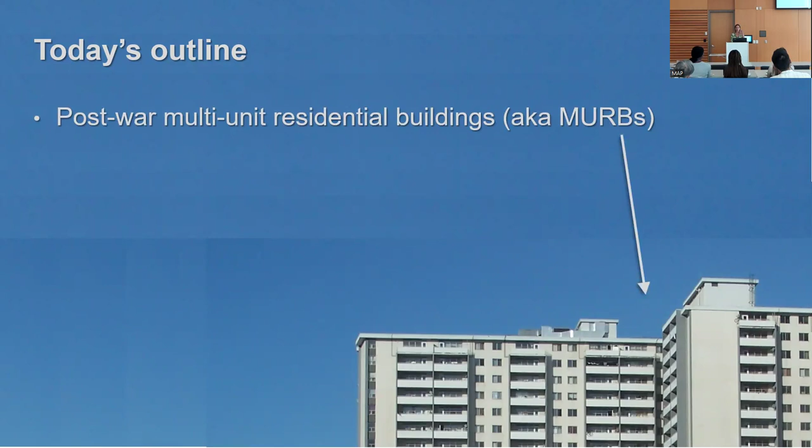I'm going to start off with what MURBs are all about—I'm a little MURB obsessed. We'll talk about some of the performance issues we see now and some of the challenges we're going to see in the future with climate change. Since I don't have much time, I'll flash some technical solutions at you to get things going, which we can explore later in discussion, and build a case for a more holistic consideration.

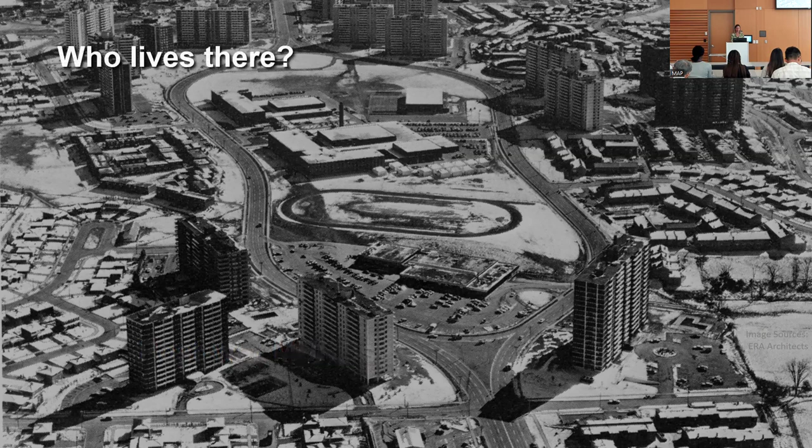So what am I talking about when I talk about post-war MURBs? How many people have seen buildings like this in and around the Toronto area? They are everywhere—we have over 2,000 of them just in the GTA alone. These are a really common building type, and thankfully a lot of them were built and constructed in very similar ways with similar systems, so as we develop solutions for these buildings, they can be broadly deployed across the stock. So who lives there?

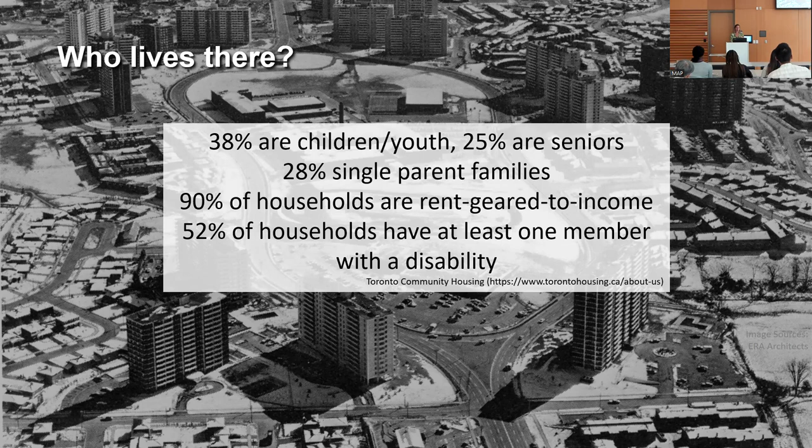I'll preface this: these statistics are actually from Toronto Community Housing, so they don't necessarily represent all post-war buildings. But a lot of these post-war buildings are serving social housing communities, as well as private rental, so we do see a lot of priority communities in these buildings. Many of them are rent-geared-to-income, and many have accessibility challenges. So these are communities we need to be paying attention to.

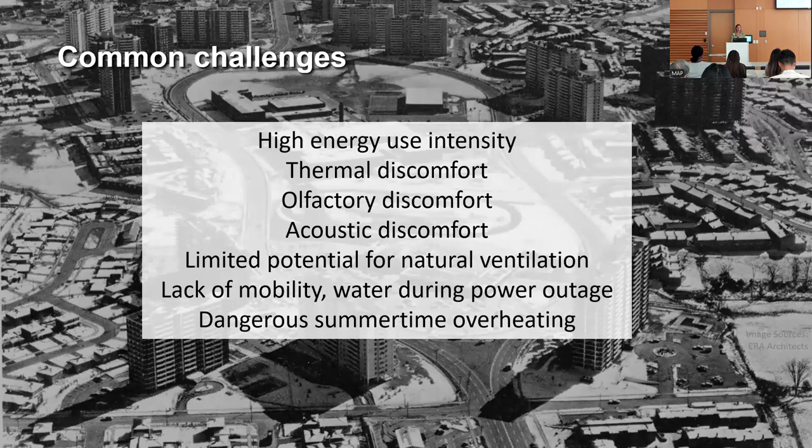As I mentioned, these buildings have a lot of very similar design features, and that leads to a lot of similar performance challenges. I'll step through these in more detail, but they have very high energy intensity. So when we think about retrofit opportunities, these are great buildings to target because there's a lot of opportunity to do better from an environmental performance perspective. While we're in there making changes, we also have to deal with discomfort issues - thermal discomfort, olfactory discomfort, smells, acoustic discomfort, and a number of other issues.

Some of this perspective came from a large study we did. I was working for the Atmospheric Fund at the time, collaborating with my colleagues at the University of Toronto, and then as I joined as a faculty member I came in on the tail end of the study with a different lens. TAF, the Atmospheric Fund, was partially funding some of these retrofits, and we were really interested.

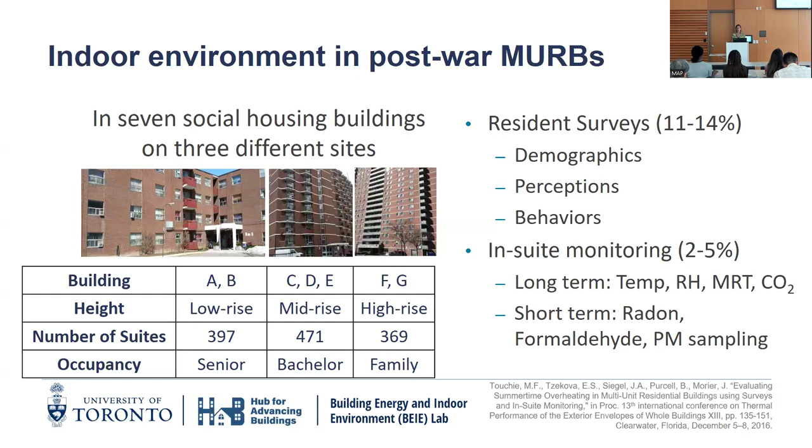These were 7 social housing buildings undergoing deep energy retrofits. They wanted to understand the impact on residents of these changes. So we came in and developed a monitoring program, surveying them periodically to understand what their experience was like. We had low rise, mid rise, and high rise buildings, and these results are all about 10 years old.

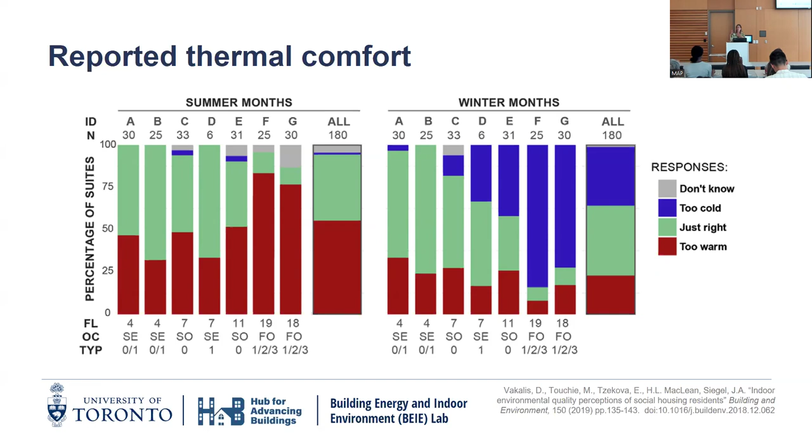Think about these thermal comfort responses, perhaps in the context of what we've been experiencing over the last week. At this time, the majority of residents were experiencing some sort of thermal discomfort. F and G are the high-rise buildings - it's very difficult to control where energy and air go in high-rise buildings, so you tend to see a lot more discomfort issues in these larger, taller buildings. F and G, you can see, 75 to 80% of the time we're uncomfortable in the summer. And in the winter, it's interesting - you've got some parts of the building that are overheating, and some parts that are not.

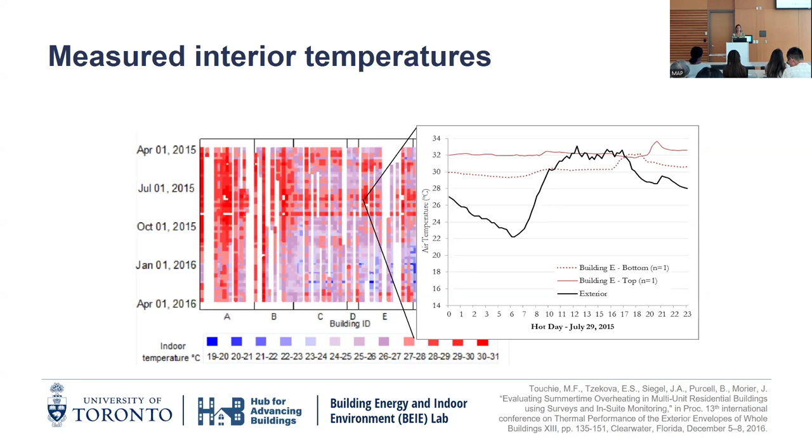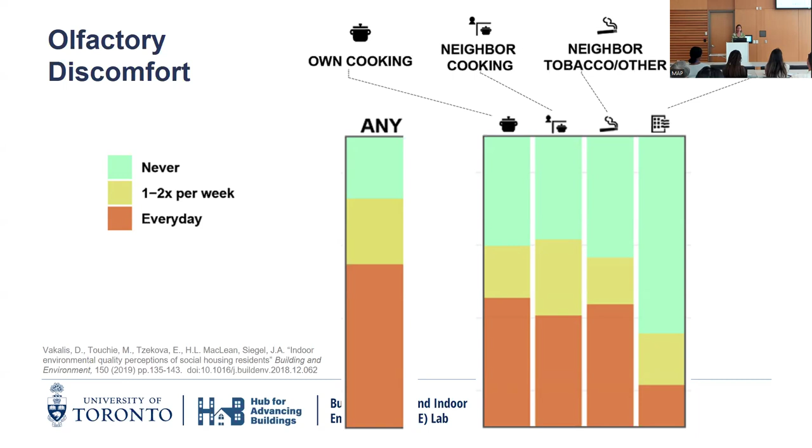From an olfactory discomfort perspective, what this suggests to us is air is not going where it should be. We're not getting enough outdoor air to occupied spaces to dilute contaminants, and we're getting cross-contamination - contaminants moving between suites. So one person smokes, another person smells it. All of these homes are really interconnected, and so there's really widespread olfactory discomfort from various sources.

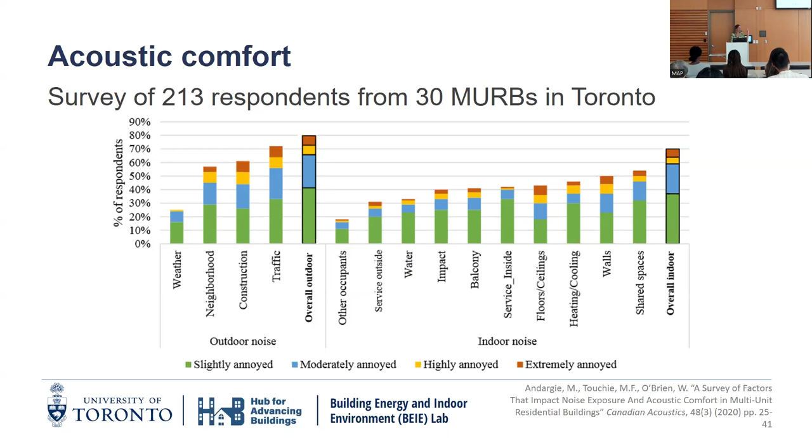This was a separate study, but we were really interested in trying to understand acoustic comfort in these buildings. These are places where your walls are connected to 4 different families - above, below, and side to side - so there's a lot going on in these buildings. I'll note that on this scale, green does not mean good - this is all kinds of annoyance, from slightly annoyed all the way to extremely annoyed. So what you're seeing here is that, again, the vast majority of people are annoyed by both indoor and outdoor sources, and this can actually have a really big impact on people.

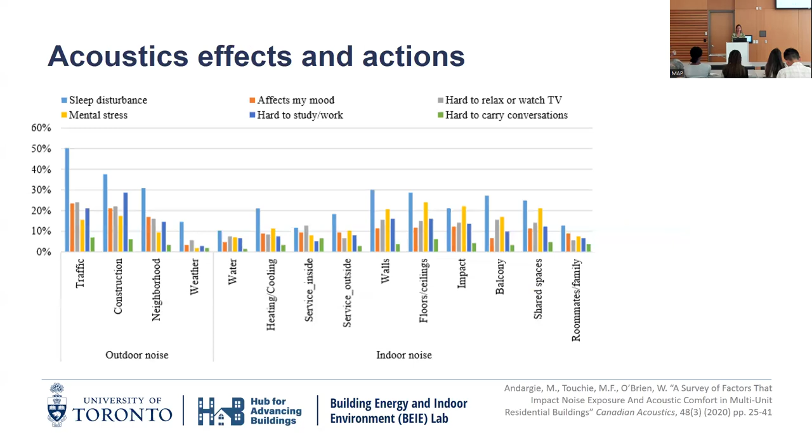It can affect their sleep. It can increase stress. It can prevent them from working or being able to study. So it's not just mild annoyances—it can actually be huge.

We went a little further to figure out how people actually cope with this. What's interesting is a lot of their responses to acoustic comfort can actually make the situation worse—turning up the radio or TV to mask other people's noise, which creates problems for your neighbors. Or it can have a negative impact on building performance, like weather stripping your suite door, which in these buildings is where your outdoor air is supposed to come from.

So you're potentially shutting off your one source of ventilation air to deal with these issues. The other really big thing we've seen in a lot of our post-occupancy evaluations is control. A lot of these larger buildings have central control. In these post-war buildings, how many thermostats do you think? Two—well done. One for the north side and one for the south side, or the east and west side, and that's how the entire building is controlled. So how do residents modulate their temperature? They open and close their window.

You can see there's these connections between comfort and energy, because if you're opening your window to reduce overheating in your suite, you're actually wasting a lot of energy, which then drives higher energy use. So frustrating for residents, but also has a real impact.

These are a number of quotes I just pulled from a post-occupancy evaluation we just finished, in a building in Hamilton. It's kind of disheartening to see. This was a deep retrofit building with new technology, brand new windows, and because there was no consultation with residents to identify some of the challenges with these new technologies, they're having a lot of challenges.

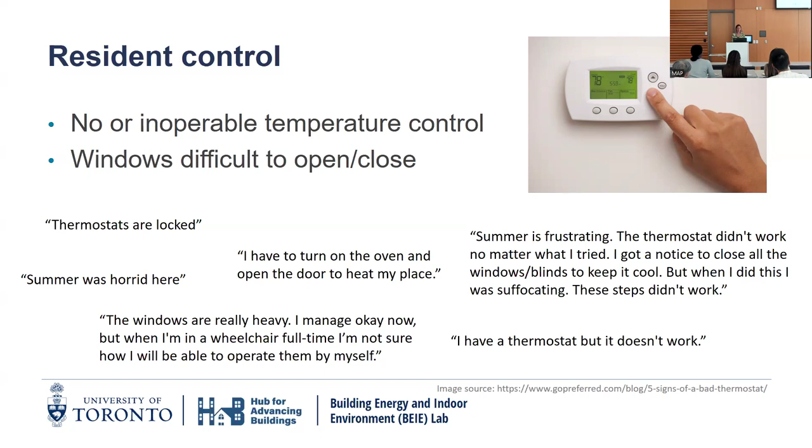In this context, I'm not going to spend a lot of time on this—I think we all know where we're going, we've experienced a lot of everything last week. So we really need to start thinking about: these buildings are not doing great now, so what are we going to do to better prepare these buildings for the future?

What we're going to start to see is increased cooling loads. The context there is, when we think about retrofits, people are often thinking about insulation, making it super airtight, adding triple glazed windows. My question is, do we really know that, or should we really start thinking about overheating?

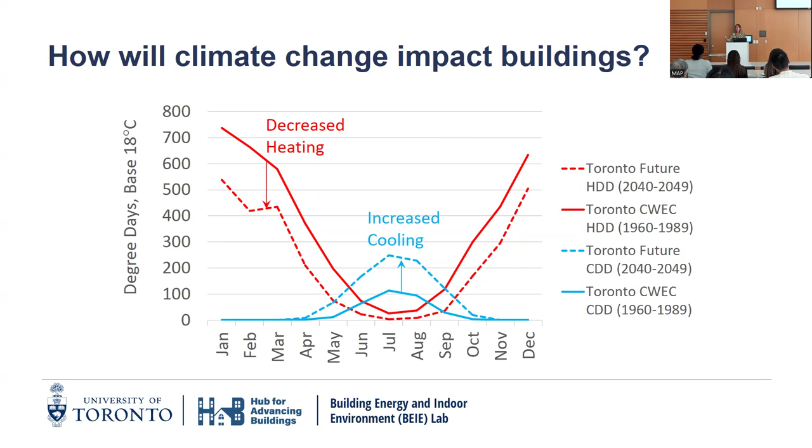What are some of the measures we can do to reduce overheating? Well, of course, reducing heating load—we'll still be a heating dominated climate for a while. But in the time I've been working in this space, we've already warmed two climates. It's happening quickly, and I think we need to pay more attention—not totally forget, but let go of some of our past practices and think about what else we need to do.

So just flashing at you, this is an indication of the CWEC—a standard weather file that we use to model our building. When we're trying to understand the implications of a design change, we create a model of our building, stick a weather file in there, and test run that building. We can see how much energy it's going to use, and what temperatures it's going to be in the space. But we use historical weather data.

So one of the things we need to start doing is integrating future weather. This was just one quick example where we compare the weather data we're using now to what we might be seeing in the 2040s. You can see that our space cooling energy use is going to go way up.

On the right-hand side is what we call unmet cooling hours. We design and size our heating and cooling systems based on what these energy models tell us. So if we are designing a system to meet that little tiny rectangle under CWEC, we are vastly under-designing the system to meet the needs of the 2040s.

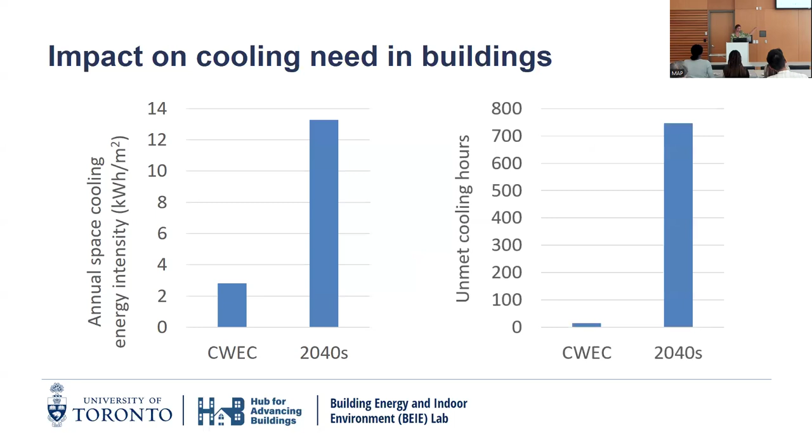So what impact does this have on people? Well, in a lot of parts of our society, people have air conditioning. But when we look at sort of the lower end of the income scale, and when we map that to who's living in these buildings, these tend to be communities with far less access to air conditioning. And this is problematic given some of the features that I just presented in these buildings.

These buildings are different. The windows are restricted to 4-inch openings. They don't have any solar shading. There's a lot of things that are actually making these buildings worse in terms of the environment that they create for residents. Plus, there's no air conditioning.

So I can flash all these numbers at you, but I just wanted to share, if you haven't seen this, CBC did a really nice investigative journalism piece on people's experience in these apartment buildings without air conditioning. And I found it really eye-opening. This is what we've been hearing from a lot of our residents that we work with in studies. But some of the videos were really compelling. So if you haven't seen this before, I encourage you to take a look.

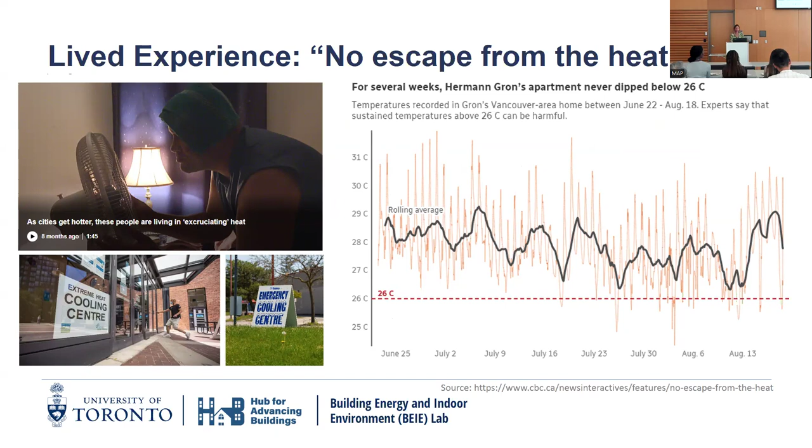But there's other things that we need to consider here. Outdoor air quality is a big one. Less so in Toronto, but we were getting there last summer. I remember smoke for a week or so there. So we need to start thinking about other ways that we can protect. We don't have central filtration, so we need to think about that as well.

And one big one that really worries me is power outages. And we saw that a little bit yesterday. But the backup capacity that a lot of these buildings have is pretty little. Emergency lights, maybe some elevators, maybe some pumps. But if we're going to have a multi-day event, these buildings will be uninhabitable.

So where do people go? What if you have accessibility issues and the elevator goes out? There's no water anywhere. There are a lot of issues here, and I think there's this looming challenge where I don't know where we're going to put hundreds of thousands of people. This talk is all about post-war towers, but the same could be said of all of the glass condos that we have.

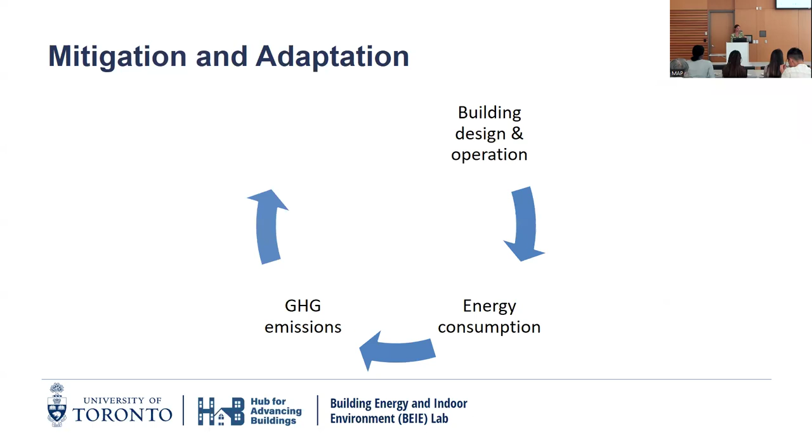So stepping back from this, we often talk about climate mitigation and adaptation as 2 separate pathways. But I think within buildings, and probably in other areas, we really need to think about these issues as being related. Because the way we design and operate buildings has a direct impact on energy consumption, which influences our GHG emissions, which in turn influences climate change. And so by driving one down, we can actually positively impact the other.

So when we're thinking about retrofit strategies, we really need to think about this through 2 lenses. We obviously want to reduce our GHG emissions, so reduce that environmental impact, but we need to start making change. We can't just keep doing it. We have to think about what these buildings are experiencing. Major renovations in these buildings only happen so often. So this is our one shot to get it right. This is going to impact families for generations if we don't.

And so when we talk about mitigation, we're talking about things like reducing energy consumption and electrification. In a lot of these buildings, I'd say 80% of the carbon emissions are because of the natural gas that's used for domestic hot water and for space heating. So getting away from those sources is critical.

On the adaptation piece, we need to increase cooling capacity, even though that has a negative impact on our operational carbon. As I mentioned, I'm really nervous about this backup power piece. We need to be more thoughtful about that, and about developing more robust ventilation strategies. I don't have time to talk about all of our research today, but if folks are interested in that ventilation piece, we're doing a lot of work on that.

But what I'd like to propose is a third lens as well. If we're investing millions and millions of dollars, like a deep energy retrofit in a tower, I've seen costing between $15 and $20 million. This is an enormous investment. If we are investing this much money, we need to also take that opportunity to improve the experience of individuals. This is not all about reducing carbon. Also, let's make these buildings better.

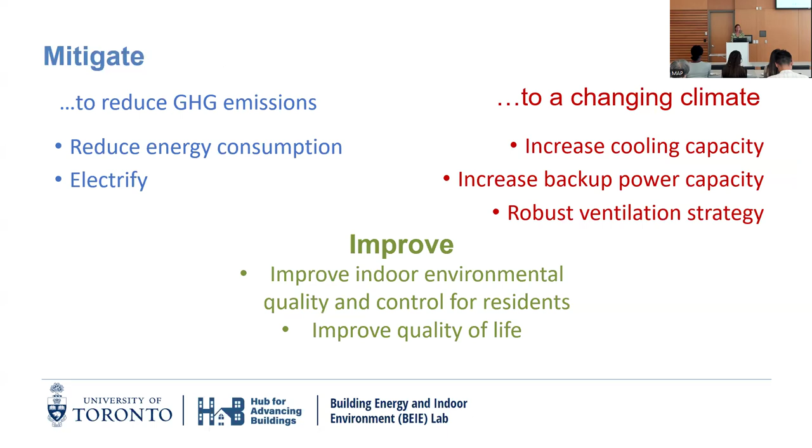And there are a lot of solutions that we can take on. So I'm going to put these roughly into a couple of big bins. So passive measures, what I mean by that is things that don't need energy. These are just changes that we can make to the enclosure that can reduce energy.

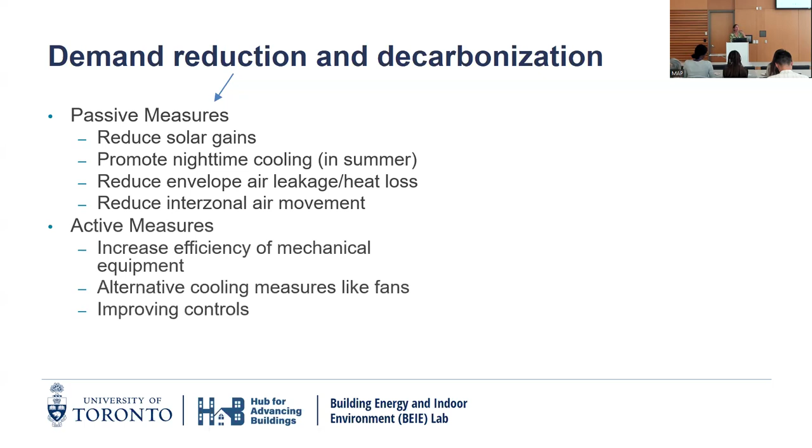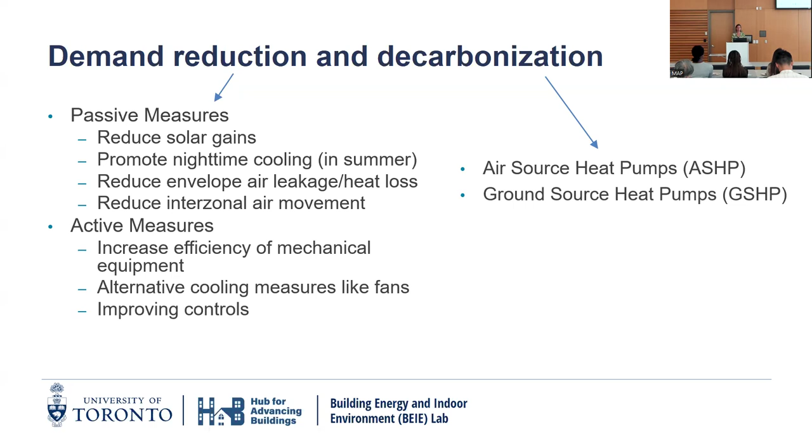Active measures, which are actually active systems, things like space heating and space cooling systems. And then when we think about the decarbonization side, this is really all about fuel switching, so getting away from those natural gas appliances into electric. So this one I'm going to go fairly quickly through. I don't want to overwhelm you with a bunch of different technical solutions, but I just want to show you there are some things that we can do that we're not doing.

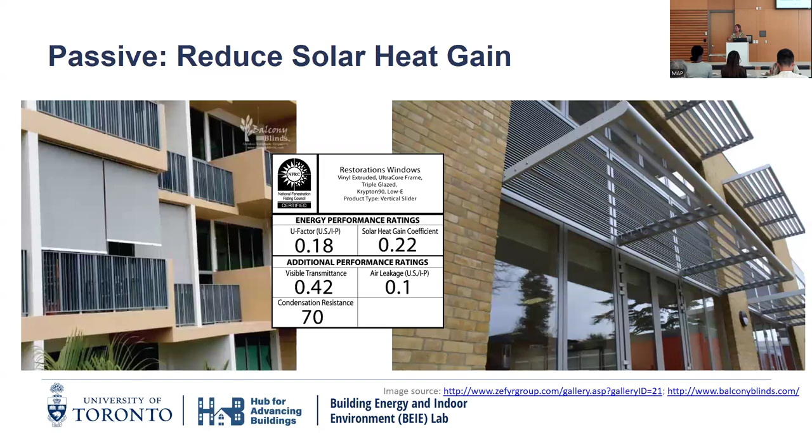Every time I travel, I think my husband gets, you know, I can't stop taking pictures of exterior solar shading. I'm like, you're doing this. They're doing it so well, and it's in cold climates that have snow, that have high winds. Like, this is possible, and I just don't know why we're not doing it here. And it doesn't have to be fixed. They have really great operational options as well, and it's particularly in buildings with balconies. I think that this can actually improve usable space too, because you now have a shaded outdoor space where you could shelter if necessary.

The other one, so I'm not sure if you're aware, but we have window opening restrictions, which are at 4 inches. You can take it off, but you're supposed to take it off for like safety issues. But one really simple thing to do is actually just to move the window opening up above the balustrade. So where you have a balcony, you can do anything there if you wanted to. But you can really open up those windows and design those windows to more fully open if you move the opening level up.

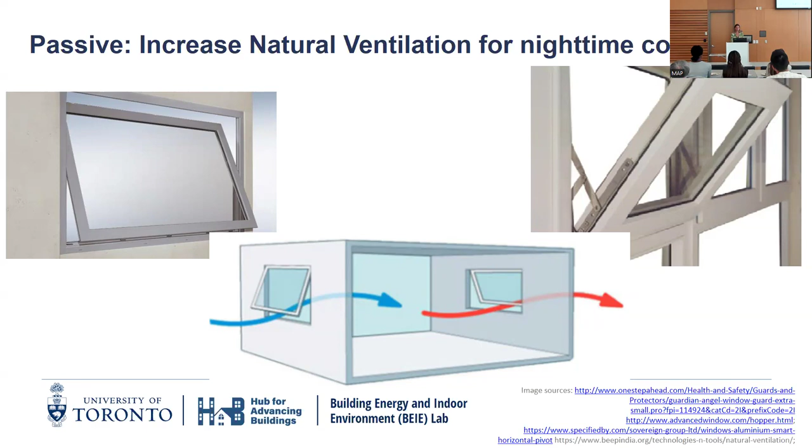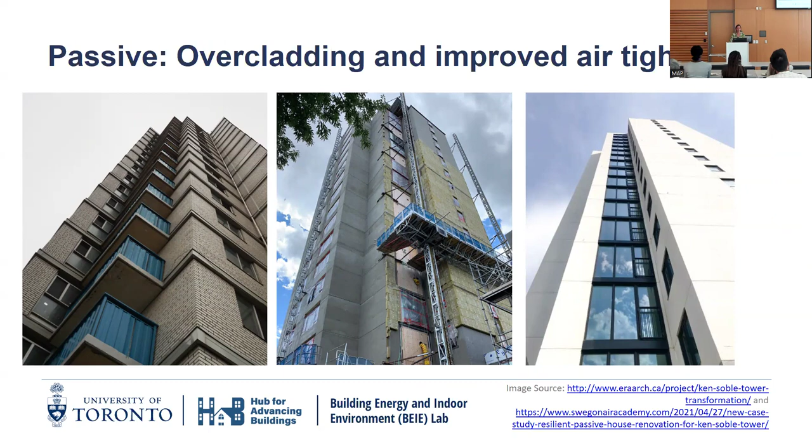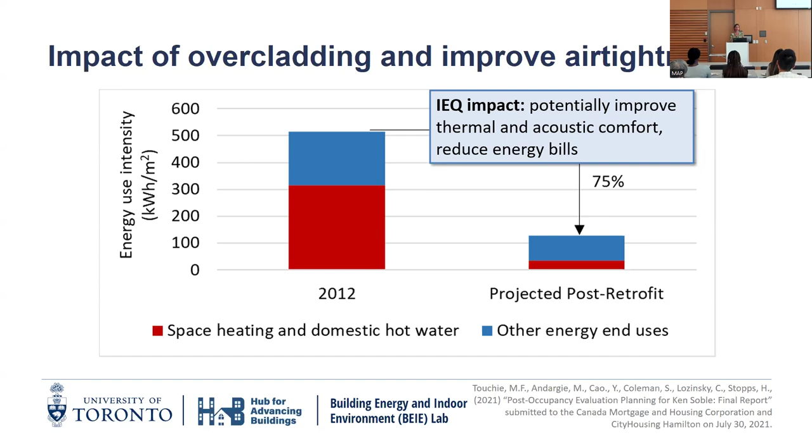Really popular right now is overcladding and improving air tightness in buildings. This is actually the building that we've been working with for the last 2 years in Hamilton. We've been following the residents, and you know, great strategy for reducing your carbon emissions, but can also have, at least in the wintertime, really good impacts for thermal comfort. But I kind of want to flag this. This is not necessarily a pathway that we absolutely should take. People are using this pathway a lot, but this is incredibly material intensive. We're adding a lot of material which has carbon associated with it, and it can potentially lead to overheating issues. Passive House, which is the standard that was regulating this particular retrofit, is great for space heating, really reduces space heating, but doesn't do a great job of contemplating overheating. And so we started to see that in this place.

So one piece that I don't think we're talking enough about, and something that I've spent a lot of time in my group looking at, is what we call interzonal air leakage. I mentioned before that all these households are connected to one another through airflow paths. That has implications for pest transmission, sound transmission, and as we showed through some of the recent studies, energy use. So this is one retrofit, fairly low cost, fairly low energy, and not that disruptive to do, that can actually tick a lot of boxes when it comes to comfort and energy. And little things like adding elevator vestibules. It sounds like a small thing, but elevators connect to these huge vertical shafts that really drive the stack effect. So you're getting a lot of uncontrolled air movement moving through these vertical shafts.

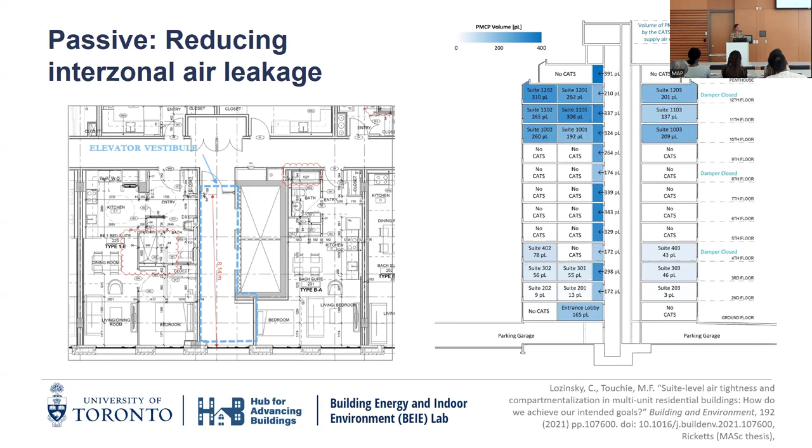And so one really effective way to achieve this with any operating residence is to seal off those vertical shafts so you kind of get each floor operating. I've had conversations with a lot of building owners on this. This is not unachievable. It's just a little more challenging depending on the type of building, but essentially what I'd love to see is each suite actually treated as an entire building.

What I would love to move towards is having in-suite ventilation through the form of a heat or energy recovery ventilator, really air sealing that suite. By tightening up that suite, you're effectively making this like an independent little house in the sky. So that person in that suite can do whatever they want. It's going to have very little impact on others. So that's kind of the direction to go.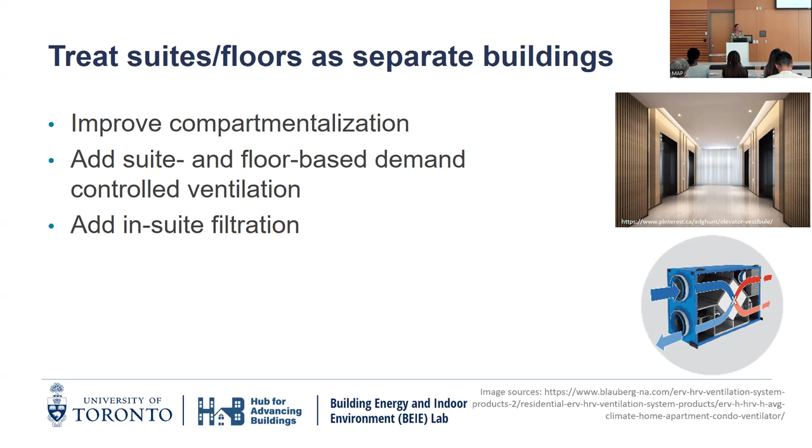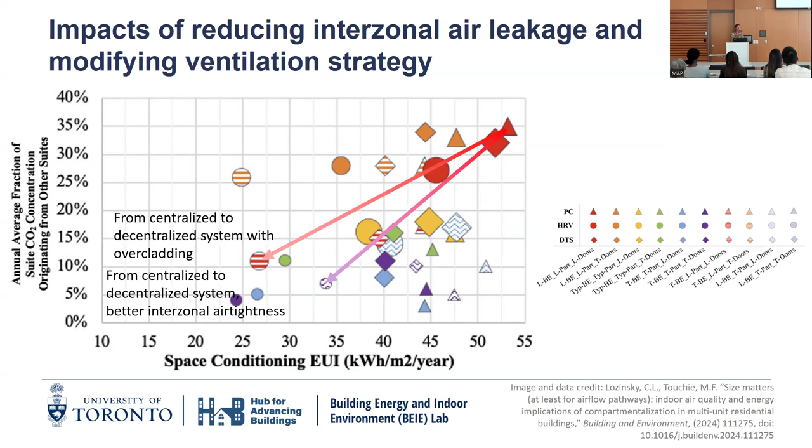So essentially what we want to do is move from the top right to the bottom left. As we make that move, we're reducing energy and reducing that interzonal transfer. And so we can do things like move from a centralized system, which can get us part of the way there. But we can make some really big leaps by just tightening up key parts like the elevator doors and stairwell doors. And then when we put those things together, when we make that centralized to decentralized move and really try to tighten up the suite, we can see improvements in both areas. So again, I think this is a strategy that we need to start paying attention to.

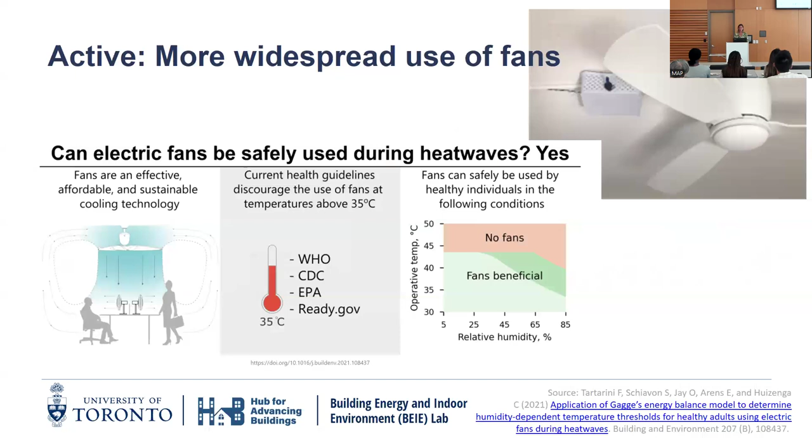The other piece too is where I think we need to start paying more attention to the co-benefits of this. There's a lot of talk about air source heat pumps right now. I mentioned we need to electrify, we need to get off that natural gas. So one of those things we can do is go from natural gas appliances, boilers, and things like that to heat pumps. I think it makes a lot of sense just from a decarbonization perspective, but it also has the added benefit of adding cooling where it wasn't before.

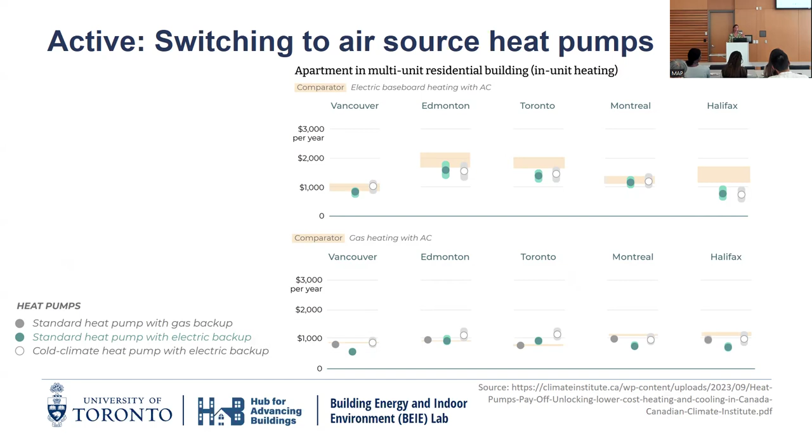Smart thermostats are another area that I think we need to start paying more attention to. They can not only decrease space conditioning loads, but they can help with all sorts of diagnostics on these buildings. One really interesting idea, and I think there's some researchers at the University of Waterloo who are working on this, is we can take advantage of the smart technology to help warn people when their indoor spaces

are no longer safe. I mean, we have smartphones and smartwatches where we could absolutely do the same, but to embed that sensing technology and that ability to warn people, you might want to go to a cooling center, or you might want to consider turning on the AC, or grab that fan. So we can use building control technologies to actually provide real-time feedback to residents to keep them safer.

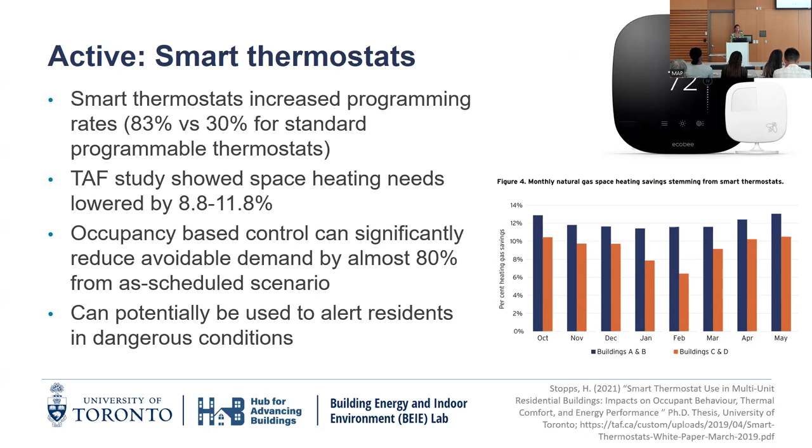And then the last one, I just want to flash at you, and you kind of go like, what is it here? But this is an area that we've been spending a lot more time in.

I've been thinking a lot about how residential spaces impact individual community development, and how we can utilize these common area spaces to really promote a sense of well-being. And it's not just well-being for well-being's sake, it's also for safety's sake. If you know your neighbors and there's an extreme event, you're going to check in on them.

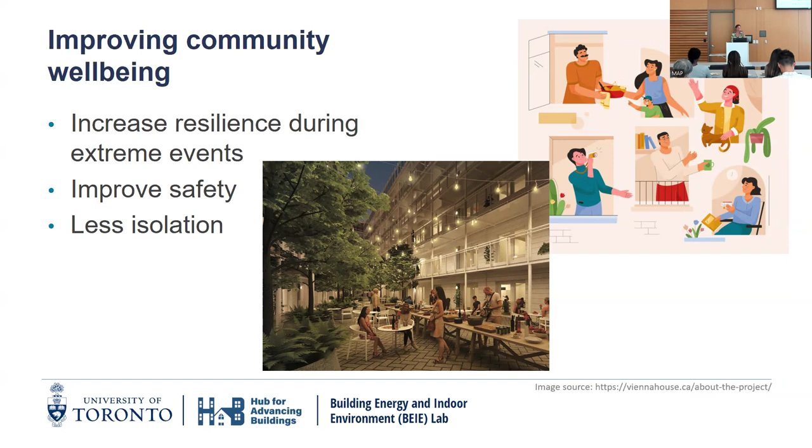When we think about the heat dome in 2021, a lot of those people died alone. Some of them had access to air conditioning and didn't use it, but I think there's, especially in multifamily buildings, this is really an opportunity to provide that level of safety, being able to check on one another. And it obviously just for people's...

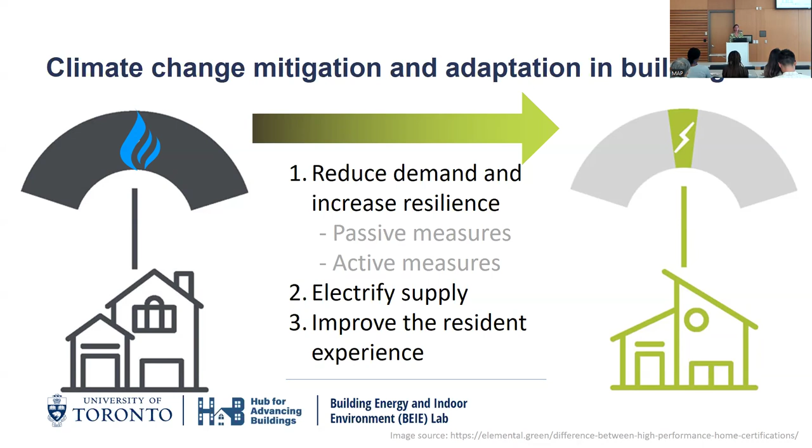So just to summarize, I really see this kind of multi-stage pathway, but they really, in my mind, need to go together. It's not one or the other. We need to reduce demand and increase our resilience at the same time using some of those active and passive measures that I shared with you. Thinking about electrified supply, really drive down that environmental impact, and perhaps this opportunity to really improve the experience of residents, because in many of these buildings...

But of course, retrofits are—has anybody gone through a deep energy retrofit in their own home? I did about 7 years ago, and I'm still traumatized by it. It's very, very disruptive to residents, and so I think we need to think very carefully about how deep we want to go.

Everyone says go deep and go fast on these retrofits, but I think we potentially need a lighter touch in some of these buildings to get people safe quicker and to potentially reduce resident disruption there. And thinking about prefabricated solutions, what are things that are kind of plug and play that can do relatively little disruption.

The other piece that I'm thinking a lot about is the impact on the building. So if you are in a private rental building and you're investing tens of millions of dollars in retrofit, you can apply for above guideline increases and increase those rents to recoup those costs. And so this is a particular sector that I think needs more support from government to kind of roll this out more broadly.

Because you're walking this fine line, right? If you need to improve the performance of these buildings, but you don't want to do so to the point where you're eliminating affordable housing options. So you need to be really careful about that. And that also comes down to the particular retrofit design decision.

A lot of these buildings are in a state of disrepair. I don't have time to go into that today, but this is also, again, only happening once every couple decades. This is an opportunity to bring everything back up to a reasonable level of maintenance, improving livability and community by creating more quality community spaces, frankly.

If you're going in there with these major retrofits—one of the buildings in Hamilton introduced a new community kitchen, community garden, which, why not? You're reconfiguring everything anyway, so make sure you include those spaces. And there are other issues with that.

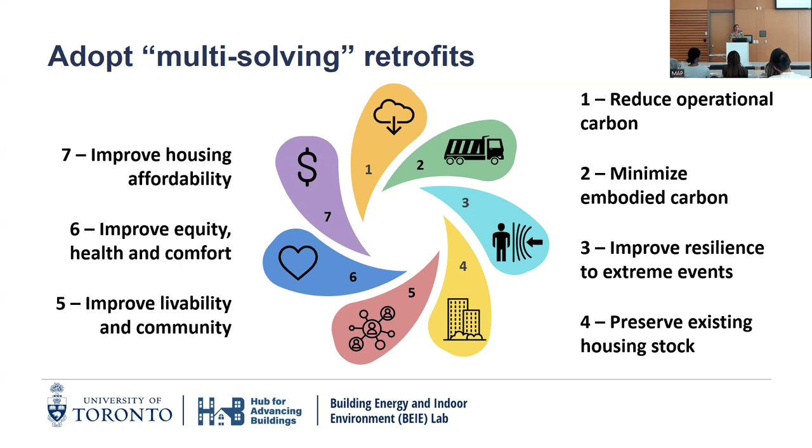I mentioned this—improving health, comfort, obviously, and equitable access to protections against climate change, and making sure that we're improving housing affordability. Right now, we tend to focus on petal one, maybe two, maybe three if you're lucky. But I think we need to develop tools. We need to reach out to the design community, consultants who put these retrofits together, to start thinking. You're not necessarily going to be able to tick all of these boxes, but you should at least be considering that anything you're investing in really needs to address multiple issues.

Funding is a very challenging piece. Like how—and there's been a lot of great work.

We started to piece together what this looks like in the private sector. That's not really my area, but it's about this balance—you can increase the rent a little bit, not too much to significantly affect affordability. You'll see operational savings as you reduce energy use, and then there's going to be a gap somewhere that you've got to fill.

The other piece I'm thinking about is at the beginning—this is something we're trying to put more effort into. We always talk about carbon and energy and the associated costs, but it's also cheap in Canada. We really need to start thinking about social support. This is where community comes in, because I'm an engineer—I know nothing about this. I'm trying to learn, but I really want to work on monetizing this and making it part of the retrofit conversation. It's really critical.

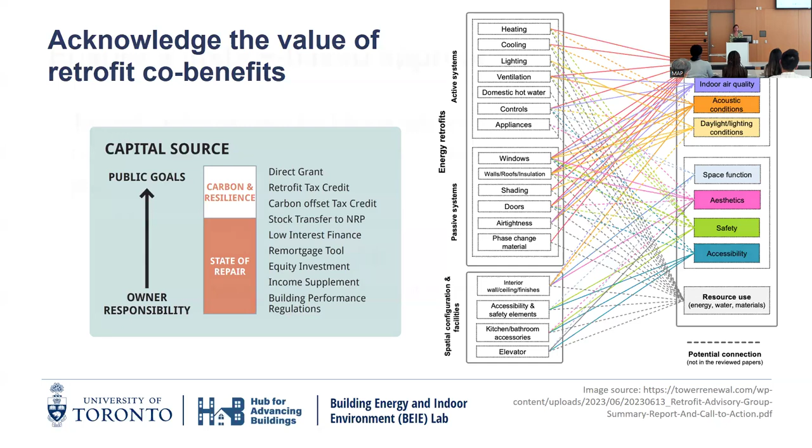I think these changes have really widespread impact. Just to conclude, I've mentioned this throughout the presentation, but I think our post-war towers have absolutely got to be the priority here. These are the communities most at risk of seeing the negative impacts of climate change, experiencing those impacts directly. But again, it also has these opportunities.

We can address energy poverty, we can address health, we can do so many things with these retrofit dollars. I believe we absolutely need to start here. By really investing in this community, the benefits to the private sector are that you develop skills in the industry, you develop practitioners who think about how to do this well, and that can make this work more broadly.

So this is my vision, this is what I would love to see. I'm wrapping up now. Just to conclude, I think every dollar really needs to do a lot more than what we're doing right now. We've got to preserve affordability and reduce disruption. I just wanted to point to these quickly.

ERA, a local architect firm, has done a ton of work in this space. The lead guy's master's thesis was actually what inspired my PhD thesis—it's the Tower Renewal Initiative. I'm sure many of you have heard of this. Just if you want to read more, there's something over there.